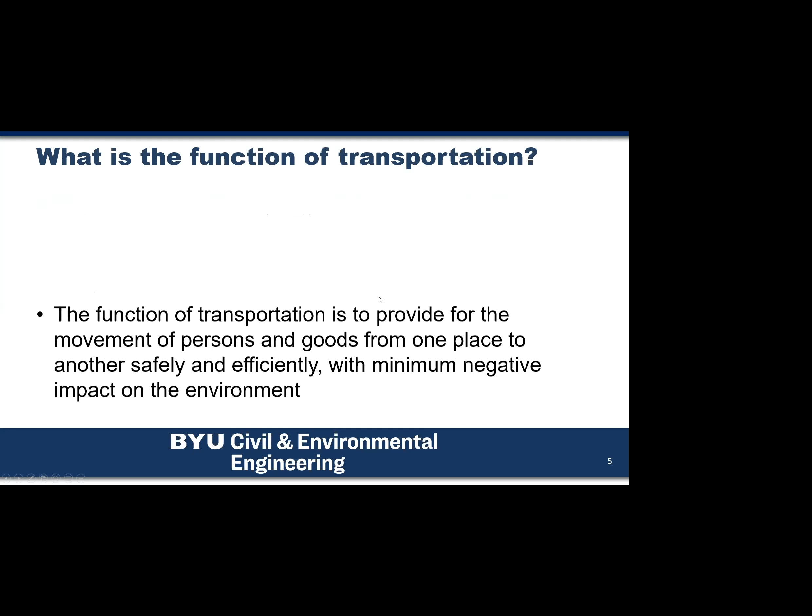So transportation, what's its function? Well, it provides for the movement of persons and goods from one place to another, safely and efficiently, with minimum negative impact on the environment.

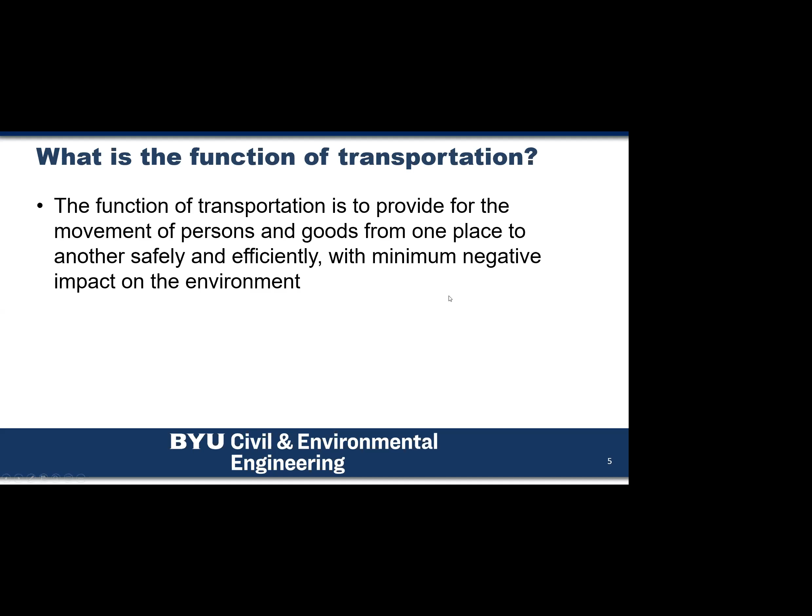That's one of the things we're trying to focus on, is minimum negative impact on the environment, and having an opportunity to provide a sustainable transportation system, so that we can all be a part of that well into the future.

When we think of the longer definition of transportation engineering: applying technology and scientific principles to the planning, functional design, operation, and management of facilities for any mode of transportation. There are a lot of pieces to it—planning, design, operations, and management for all those different modes, whether it's bicycles, auto, or air—so we can provide safe, rapid, comfortable, convenient, economical, and environmentally compatible movement of people and goods.

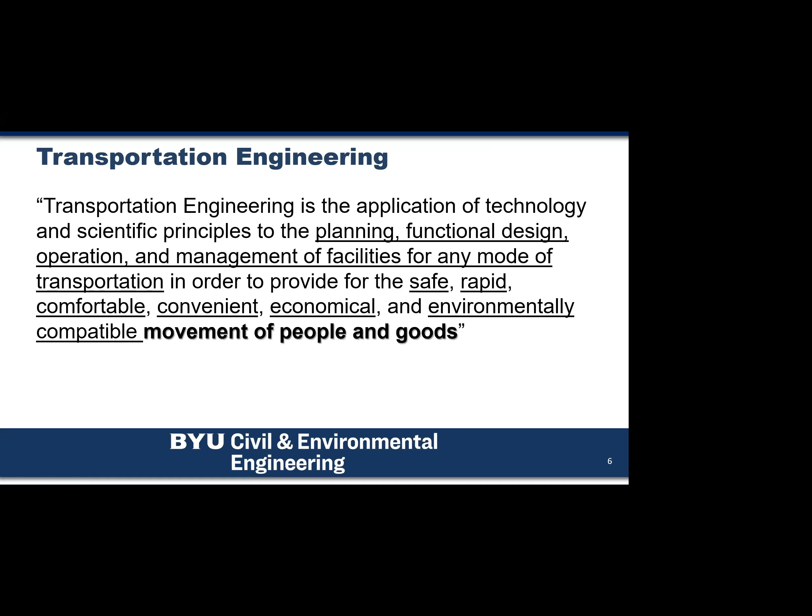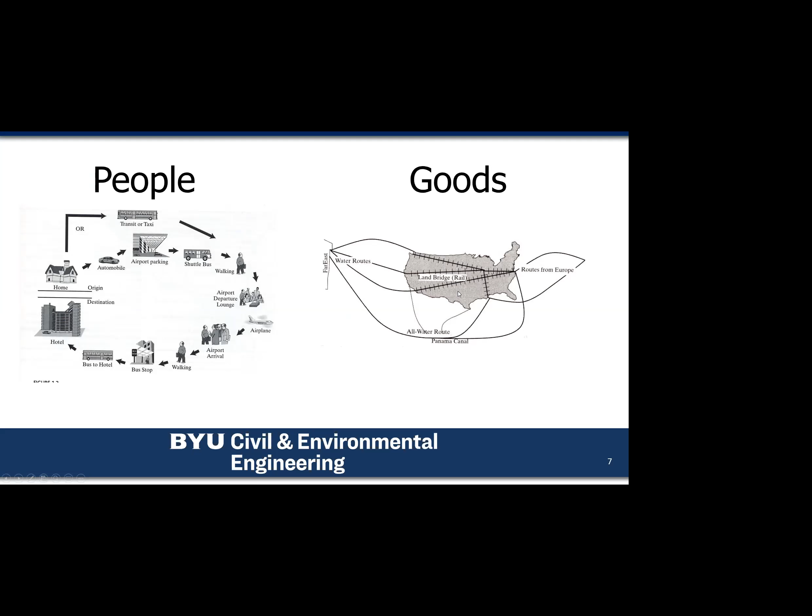Here's a couple of quick examples. You can see moving from your home to an airport, taking an airplane, arriving somewhere at another airport, a bus or rental car—all of these things involved in getting from your point of origin to your point of destination. And if we look at goods, we've got water routes, air routes, rail, auto or trucks—all these different things giving us the goods we use every day. All of that is also a big part of transportation.

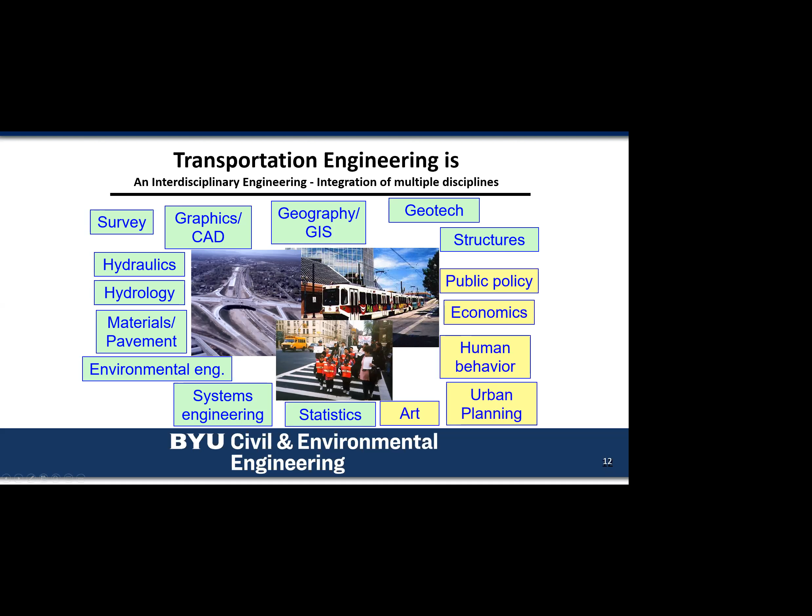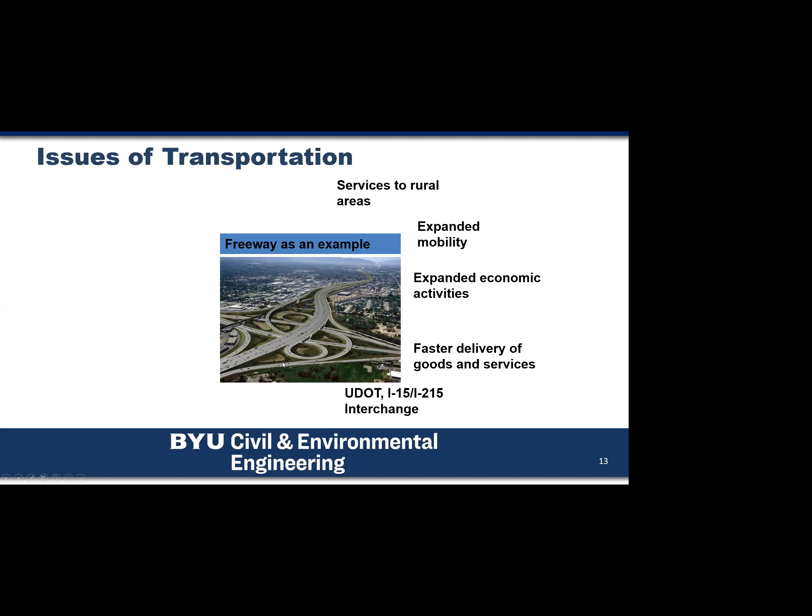And with that, we see some issues and challenges we have to look at. How do we provide service to rural areas, expand mobility, economic activities? We also have environmental challenges: congestion, delay. We've all been caught in congestion at different times, no matter what mode of transportation we're in. We have safety concerns. There's a lot of different things that we need good, strong minds to figure out ways to make better all the time.

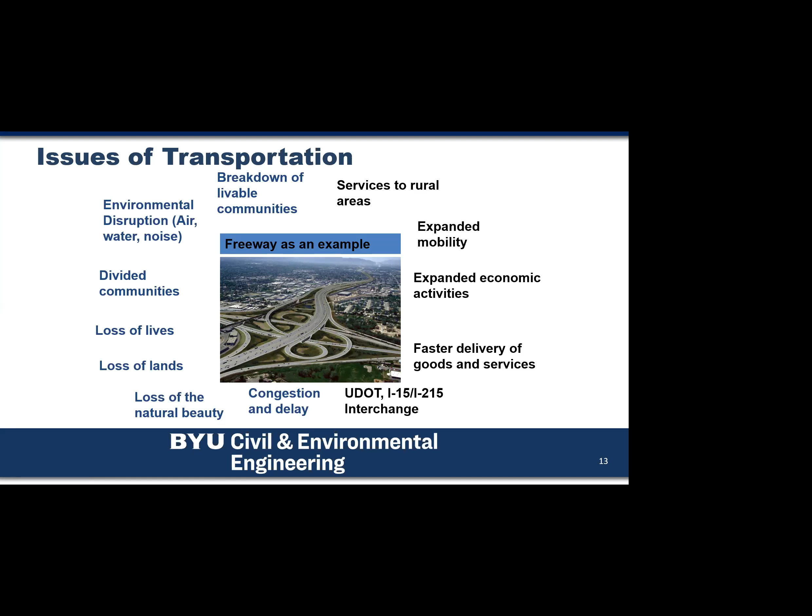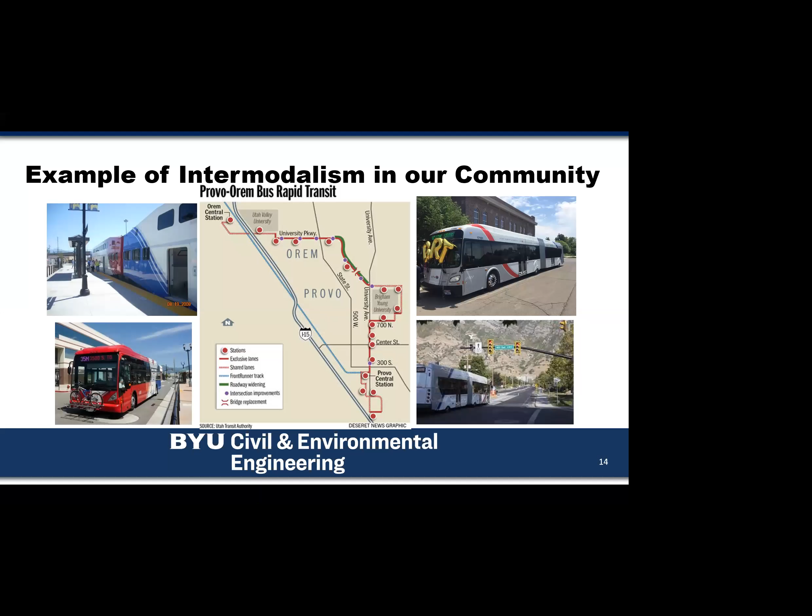We have intermodal transportation systems. So we've got the FrontRunner, the UVX. We've got a lot of different opportunities for us to be part of an intermodal transportation system.

The UVX bus, we're not using it as much now, but the question I have for you: have you ridden on UVX? True or false?

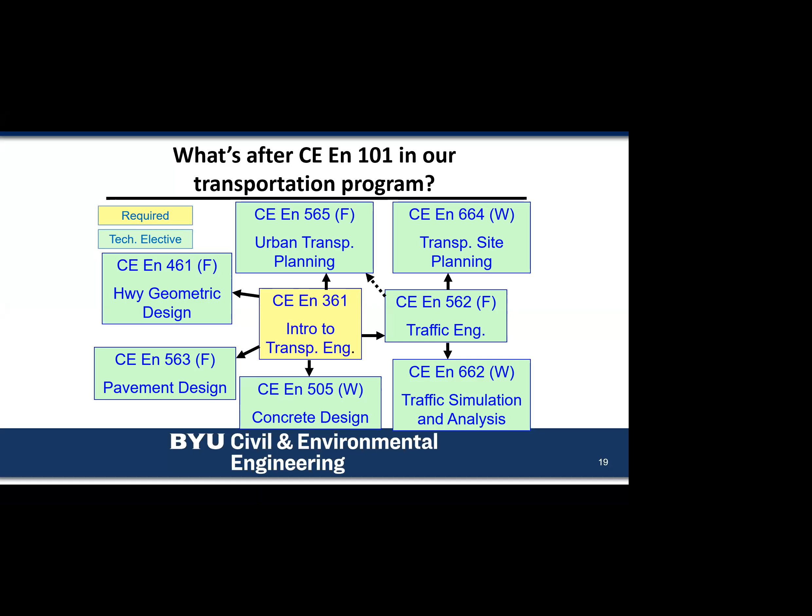So there's a question in the chat: when you say competitive, are you talking about getting a job? Yeah, I mean, that's making you a competitive engineer in terms of getting a job and being able to have the skills that will help you get that job, or maybe that little better job than you might have otherwise gotten.

So we have 3 faculty in transportation in the department. There's myself, and then Dr. McFarlane is our transportation planning engineer. Dr. Guthrie is pavements and materials. And the area I work in specifically is traffic engineering and safety. I've also done a bit in planning over the years and had some experience there as well.

I guess I'll throw this out too, I didn't talk about it in my introduction: I've been here at BYU for 17 years. Prior to this, I was at the Texas A&M Transportation Institute. I got my PhD at Texas A&M University. Before that, I was a consultant in Salt Lake City for several years and in Boise, Idaho. So I spent some time in the consulting world, then went back to school, started into research, and then came to the university here.

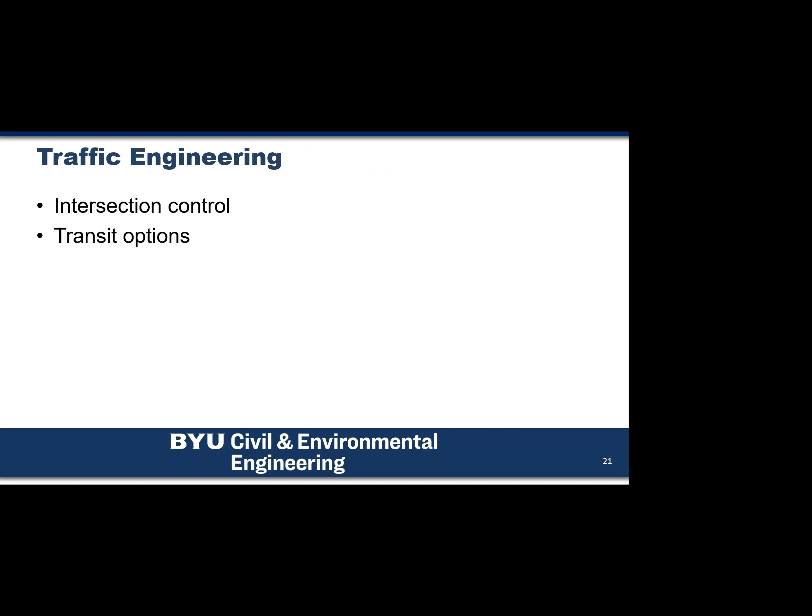So let me just talk a little bit about some of the different aspects of transportation, traffic engineering. I'm going to talk a little bit about intersections and transit, and I'll talk just for a few minutes about planning and pavements as well.

But one of the things that we look at in transportation, and one of the things that's kind of fun about being a transportation engineer, is everybody really is a transportation engineer in their own way. If you have a driver's license, you feel like you are a transportation expert sometimes. So it's kind of fun, we get a lot of opinions that we have to work with and look at different ways to improve transportation engineering.

So this is one of the things that we are always looking at ways to deal with: left turns. If we didn't have to deal with left turns, if everybody would just be like UPS and drive right turns and go in circles, then we would be able to move traffic a lot faster and safer, but people may not get anywhere, at least in the way that they're used to getting. So left turns is something that we're always looking at.

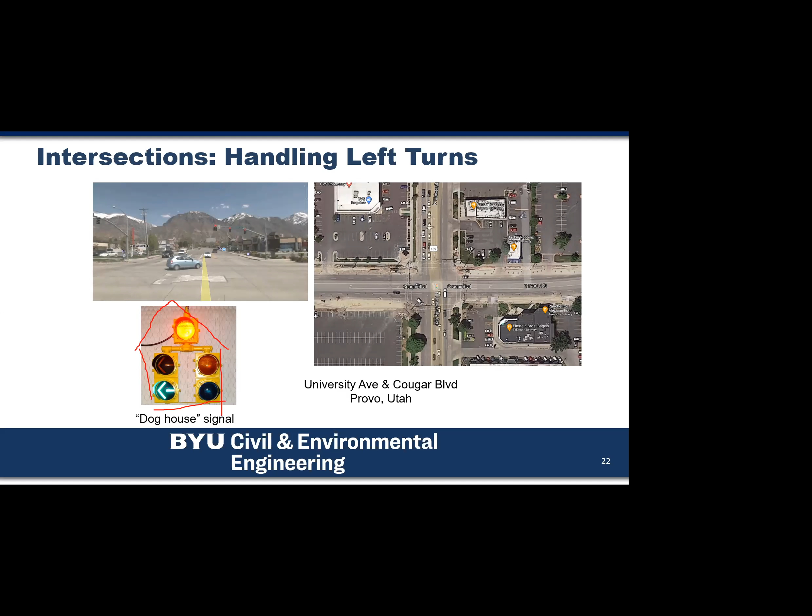Now, that's how we used to do these signals, but we've now changed them to what we call a flashing yellow arrow. Maybe some of you have seen flashing yellow arrows before if you're in Utah. Maybe some of you haven't been to Utah much and have seen these in different places. But this is basically the same thing as this doghouse, but what it does is it provides us opportunities to handle left turns in different ways.

So we can do them as a protected left turn, which is when we have the solid green arrow. We can do them as a permitted left turn, where we have the flashing yellow arrow, and then a solid yellow arrow, of course, red arrow meaning we don't go. But those are some of the things that we do with left turns.

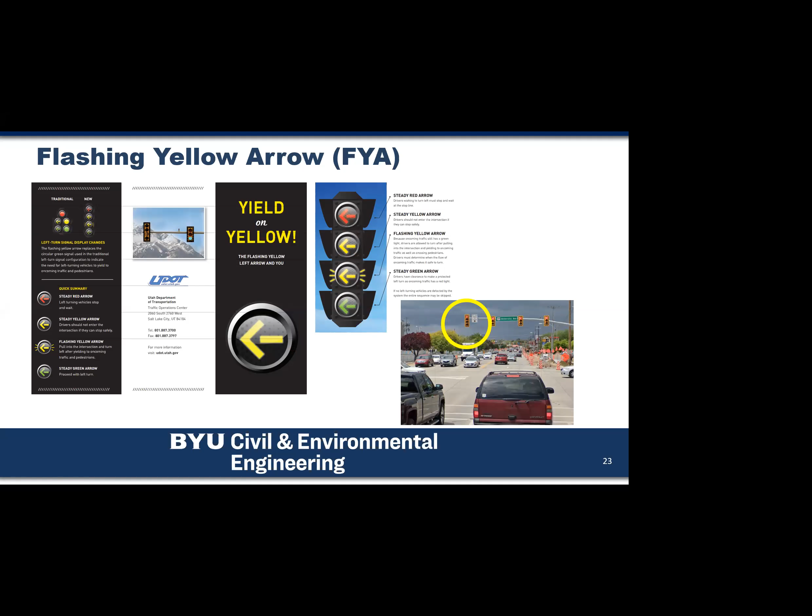In Utah, we like to do some other things with left turns, though. Those get into kind of some interesting intersections and intersection designs. So let's see if we can make this work. This is what we call the continuous flow intersection. I'm sure that you've seen this, and we'll see if my little link is going to work for us.

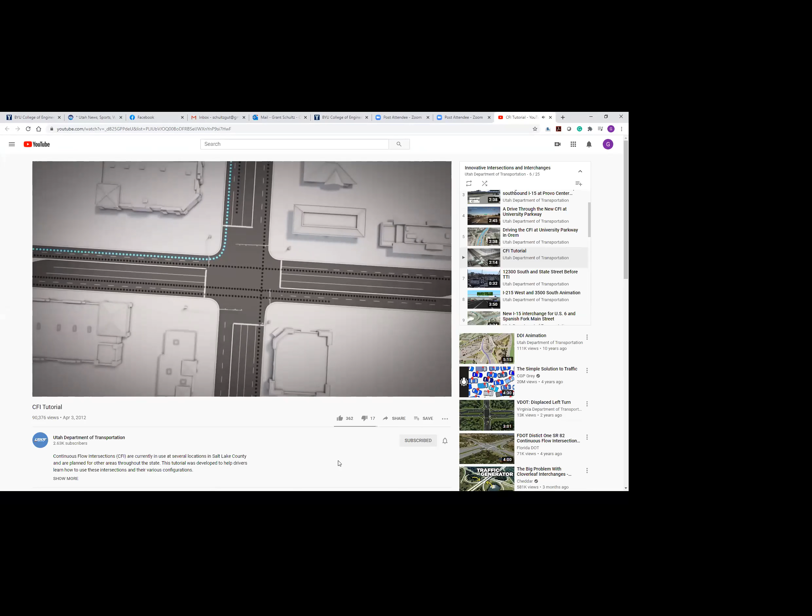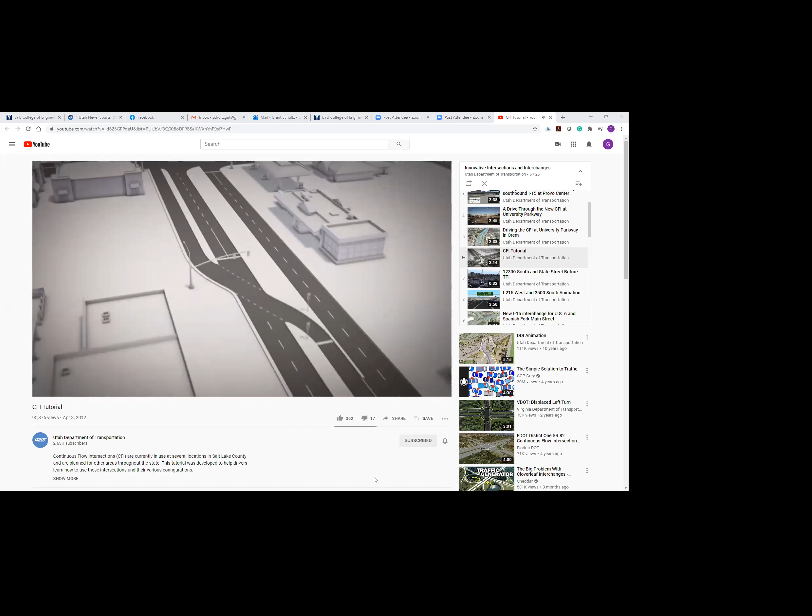At UDOT, a major goal is to optimize mobility. And in Utah, the Continuous Flow Intersection, or CFI, has been used to optimize east-west movement. It all boils down to traffic signals, a crucial safety feature of a busy intersection. Traffic signals help drivers avoid potential conflict points. But a traffic signal also means you can't keep moving. And the more traffic there is, the more complicated the signals. A CFI reduces conflict points, which leads to more green time at the intersection. The most visible feature of a continuous flow intersection is the left turn crossover. This allows drivers to make their left turn before they reach the intersection, reducing conflict points. This feature alone has been proven to increase the number of cars moving through the intersection by up to 70%. But for a CFI to work at its maximum potential, drivers should be aware of all its features.

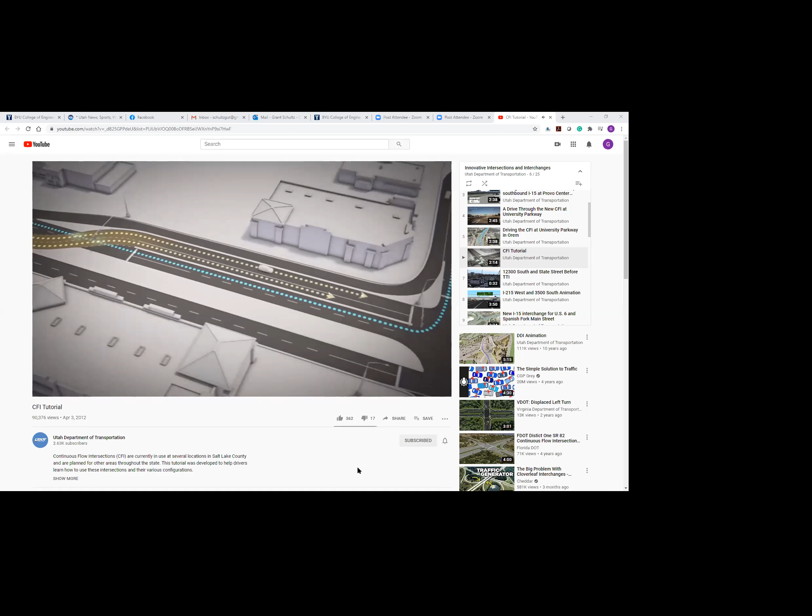In a continuous flow intersection, the fewer crossing lines of traffic, the better. So a CFI can include a bypass right turn, which allows right-turning cars to avoid cross traffic altogether. Sometimes a bypass right is omitted in order to keep local businesses operating. Avoiding business disruptions supports the economy. In such cases, right-turning cars must wait at a special light before proceeding. This light prevents conflicts with the left-turn crossover vehicles.

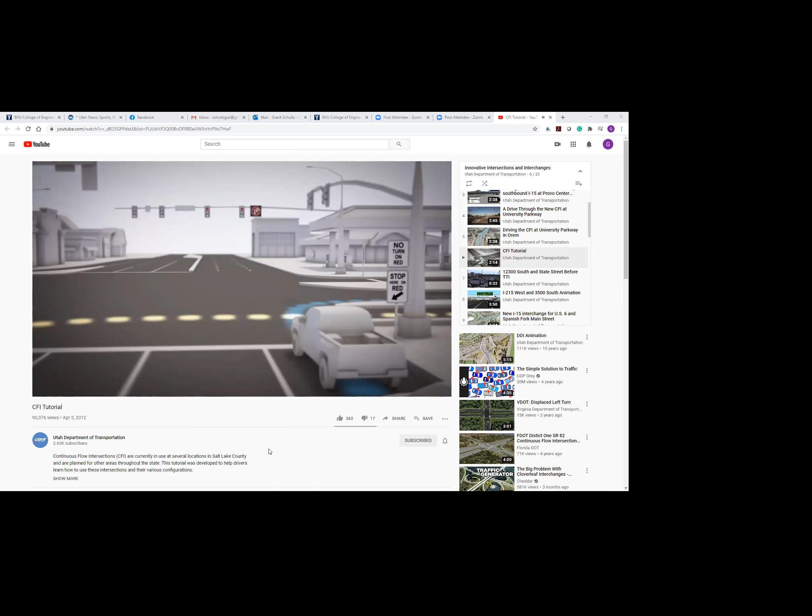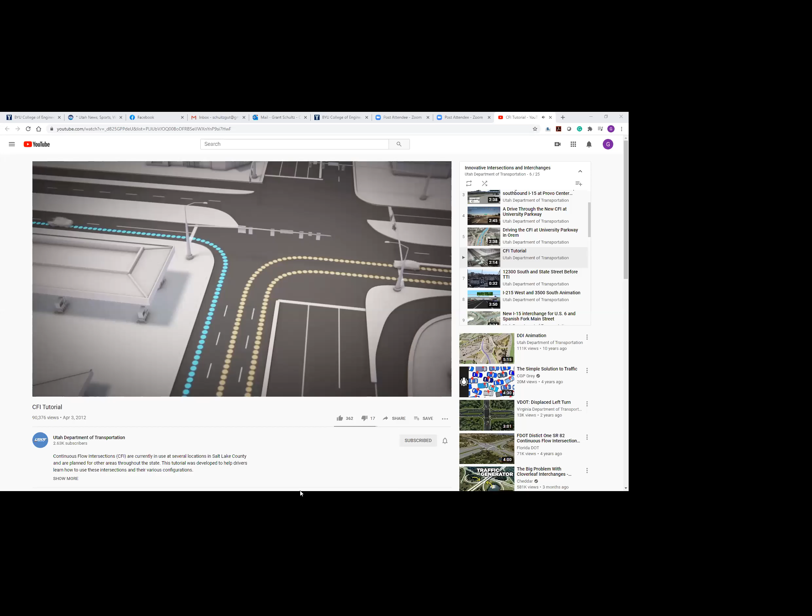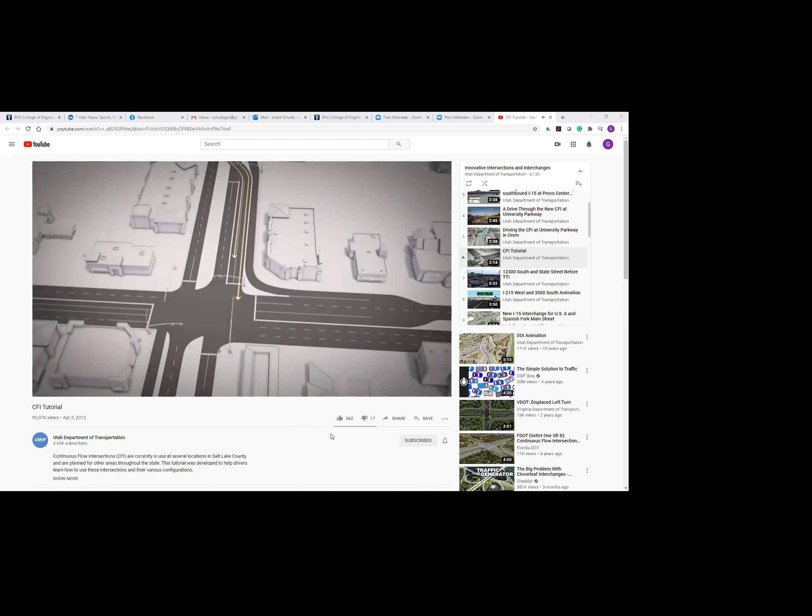Sometimes crossover left and right-turning drivers will converge at the same time. It's important that each car stay in its own lane as these vehicles come together. Sometimes drivers get distracted and drift out of their lane when turning, but this doesn't work in a CFI where each driver needs their own lane to turn safely at the same time. If the road isn't wide enough to receive all incoming traffic, right turns may need to wait for crossover lefts while other drivers continue moving. Once the crossover lefts are finished, right turns are free to keep moving. Continuous flow example of how UDOT keeps you moving.

All right, so there you go. There's one type of intersection. I should have probably had a poll here to see how many of you have seen a CFI. But this just kind of gives you that opportunity.

One of the things, like I talked about, was left turns. Left turns become a real challenge for us in terms of being able to accommodate all the different movements at an intersection. So what this does is brings that left turn movement further back so that these vehicles can turn left at the same time as the through movements. So this is a really good opportunity for us to move those left turns out of that intersection.

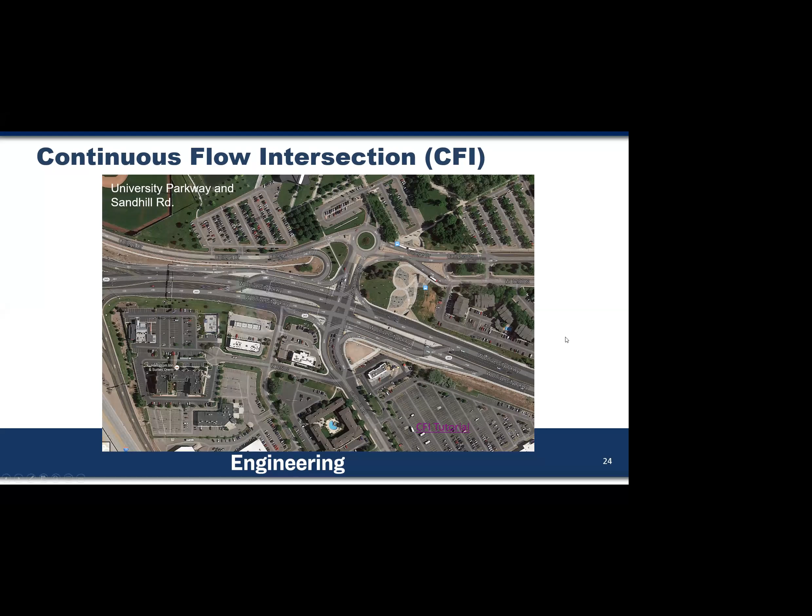One of the other things that we see or that we look at is what we call a diverging diamond interchange.

This is another opportunity for us to take the left turns out. So in this one, we come off the freeway, and if we're going to turn right, we come up this ramp here and go on our right turn just like we normally would. Or we can come up here, and in a normal intersection we would come off of here and have a signal right here and have to wait to cross over to our intersection. But here we actually turn left and go the wrong way.

Now, some people get a little concerned about this. They don't like to go the wrong way, but it's the right way in some countries. And then we get to this point where we have an intersection. So at this intersection, we now have the opportunity to cross back over and continue on our way. But by bringing the driver to the left side of the roadway, we're able to avoid conflicts with these left turns, and all we have are these two-phase signals at each side of the intersection. Fewer conflicts means a safer environment, and allows us the opportunity to provide a safe transportation system. These vehicles come off here and go onto the freeway this way, and we have the same thing coming off all of the other directions.

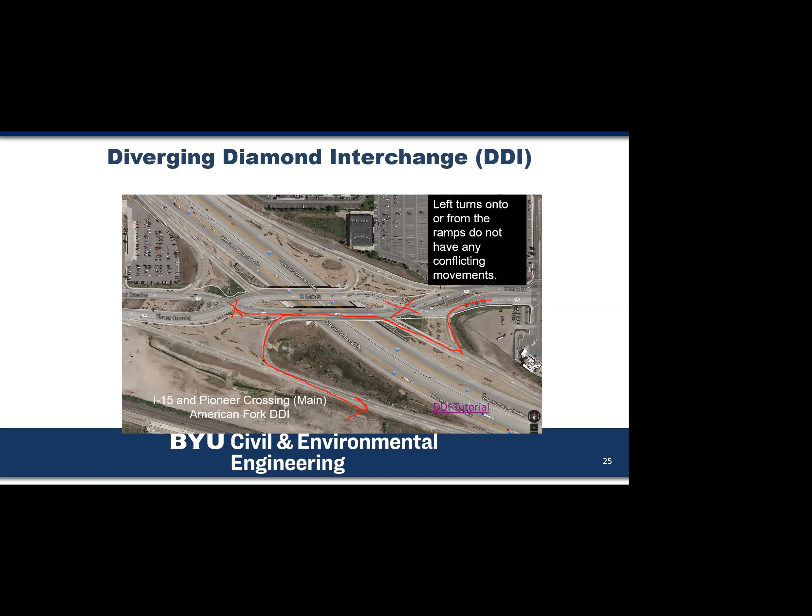Let's see, Provo Center Street—yeah, we won't talk about that one. That one does not do much for left turns and does some interesting things. Yes, where I drew the X's, there are traffic lights.

All right, anybody have any other questions about those two, CFI, DDI?

How common is it to remodel older designed overpasses and intersections into these newer ones? That's a good question. There's definitely a cost involved, so usually there has to be a need, and that need is usually a safety concern or an operational concern. We do see that happen. Bangerter Highway in Salt Lake City is one area where we went from regular intersections to CFIs. Now we've also done just a standard diamond interchange, a tight urban diamond, because there's not a lot of room there since it's all built out, so they utilized the space they have and did a diamond interchange.

Let's see, video on DDI decreasing the chance of an accident by 50%—yeah, because we've taken out those conflict points. I don't have anything in this presentation about conflict points, but that's a critical piece of it. And like I said, we won't talk about Center Street. You'll have to take 361 from me and we'll talk about it there maybe.

Why is I-15 always under construction? We'll end with that question and move on. Because we're engineers, we love transportation, we love construction. So I always tell my students that the orange barrel is your job security.

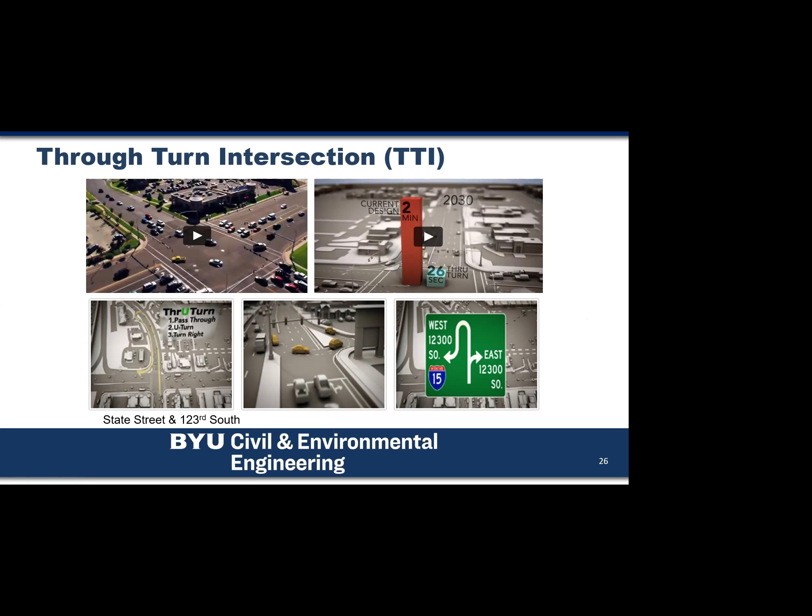So there's one other way we look at left turns in this presentation, and that's through what we call a through-turn intersection. This one is a little different again.

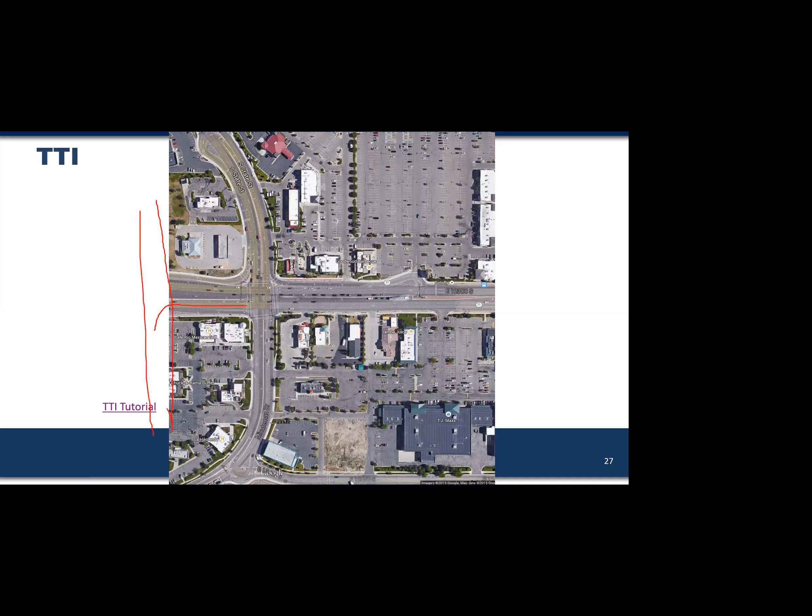Here's what we had: this is right off I-15. We come off the freeway and come to an intersection, and suddenly you've got a really heavy volume intersection. If we get a lot of left turns at this intersection, whenever those left turns are moving, it stops our through movement—we can't move any through traffic. So we have to look at other alternatives.

One alternative is to get rid of all the left turns here and run vehicles up further, where they do what we call a through turn—they come around and then turn right. Again, we're taking left turns out of the intersection while still maintaining through movement. You can see there's a through turn over here, one up here, and one back here.

So this takes those left turns out of the intersection and allows us a different alternative. This kind of came about from jug handles, Michigan left turns—there are a lot of different names for how this got started. They were generally in rural areas in the past, and UDOT decided to try one in an urban area, and it cleared up traffic concerns and allowed movement to flow more smoothly.

This one is in Draper, at 12300 South and State Street, right off I-15, and there's a lot of opportunity there. These came about more in the east, and we've kind of moved them this direction. So those are just some examples.

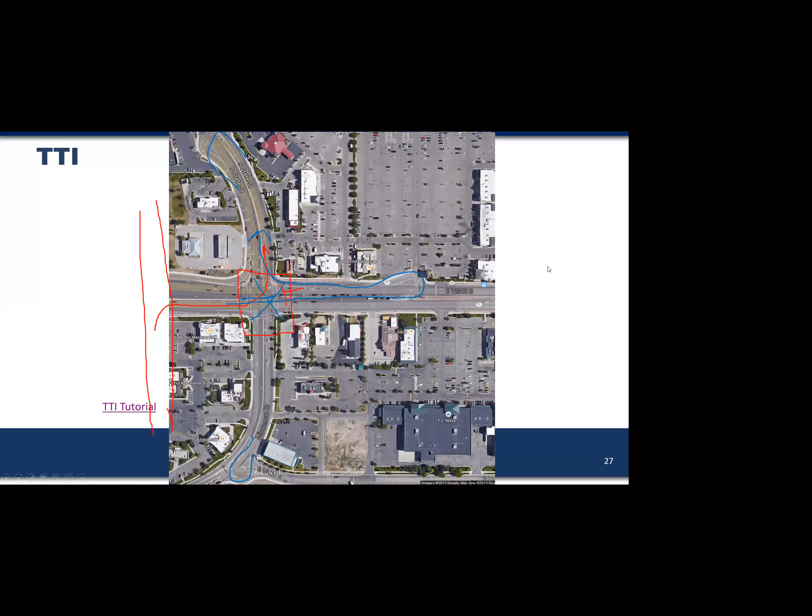We've done different projects related to safety, which I'll talk a bit more about in the few minutes I have remaining. We're doing some work right now on connected vehicles, looking at what's called dedicated short-range communication—we've done it between transit buses and signals, and now we're doing it between snow plows and signals, so we can look at transit signal priority or signal preemption for snow plows to keep them moving down the corridor.

We're doing some work on automated traffic signal performance measures. We're working on traffic incident management with the different incident management teams out there that help clear up crashes after they occur on the freeway. So a lot of different projects, a lot of different things going on here at BYU.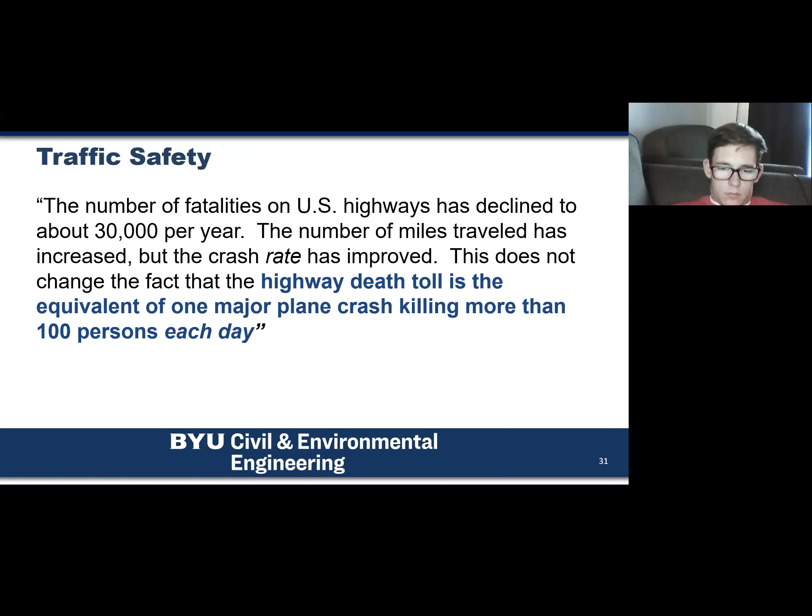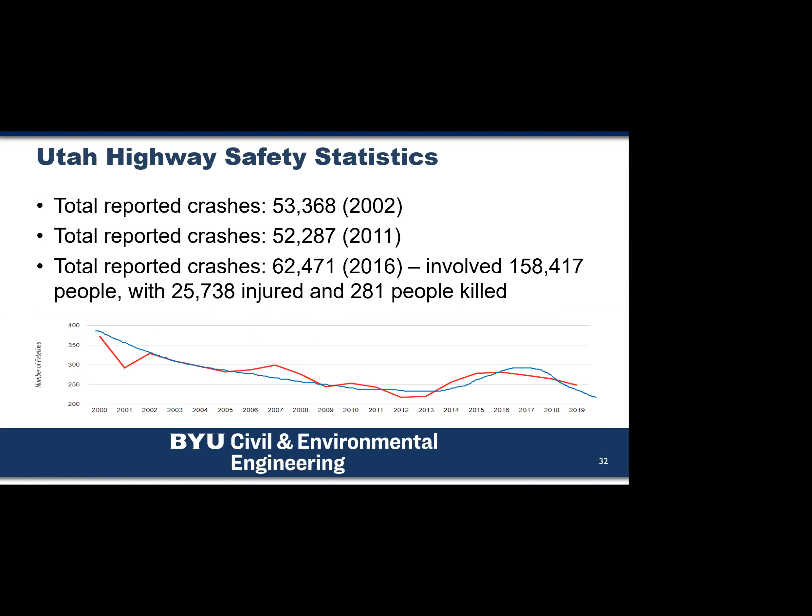Safety, we have a lot of fatalities that occur. Our highway death toll is the equivalent of one major plane crash killing more than 100 people every day. So I spend a lot of time working on safety, trying to identify ways to make our roadways safer. And you can see we've made improvements over time. Everything was coming down nice, and then we had a little blip, and now we're coming back down again.

If we look at this one for a minute, we can see fatality rates. Our fatality rates have dropped over the years, but our numbers of fatalities are still pretty high, 35,000 a year. So that's one of the things I work on.

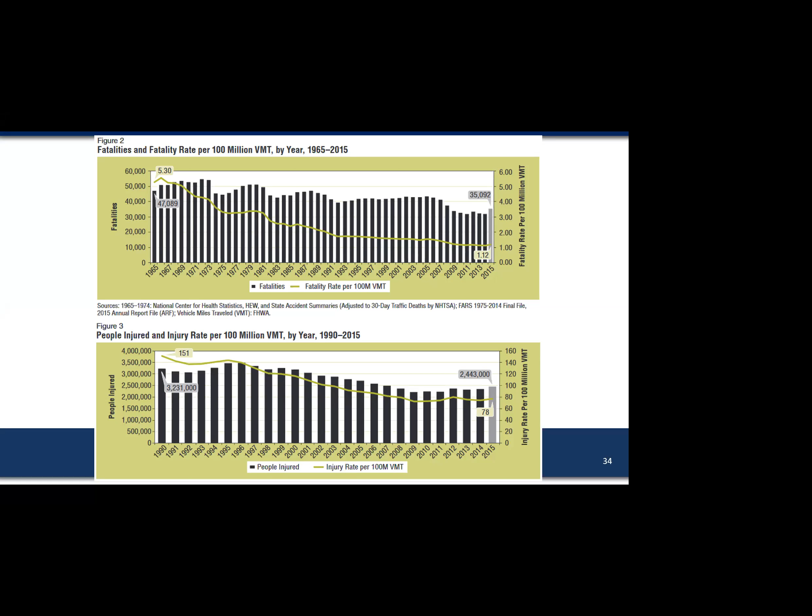Planning, Dr. Macfarlane does a lot of work in planning. Basically what planning is trying to do is make decisions of how big do we make the roads, what are our needs going to be 20, 30 years in the future. We see all those construction barrels out there in projects, but those projects have been in the planning stage usually for 15 to 20 years. It takes that long to get through the process of planning and environmental clearances, actually designing the project, getting the funding that we need, and then being able to get in and build that project. So we're always looking to the future, 20 to 30 years ahead, to decide what we're going to need.

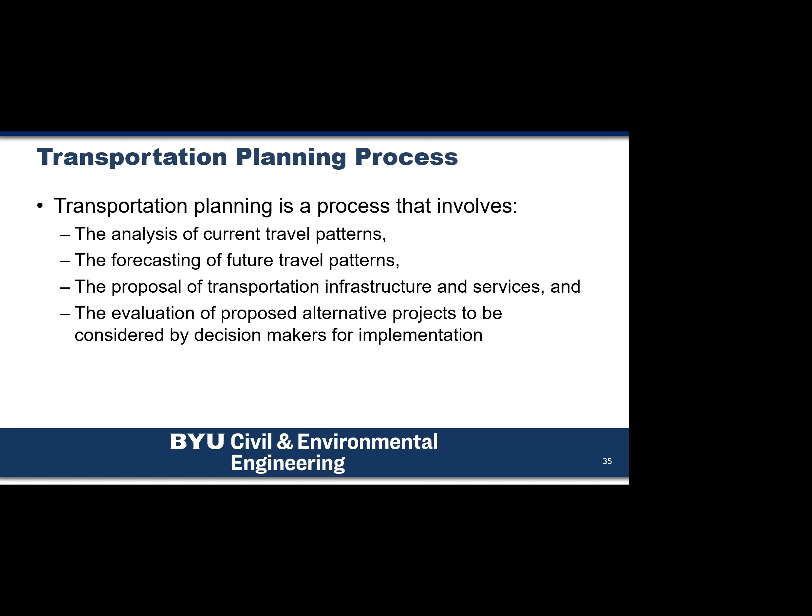Just kind of thinking about that, let me jump into here. All of that ties into what's called a 4-step planning model, where we make decisions every day. We try to decide what kind of trip we're going to make, where we're going to go, what mode of transportation we're going to use, and what route we're going to take. All of those things are really helping us to make decisions on what's going to happen in the future.

A question came up: if it takes that long, won't the plans be outdated? Well, that's the thing, we're making projections to the future. Yes, we're always adjusting those projections, but they're pretty close in terms of what we're trying to plan and accommodate.

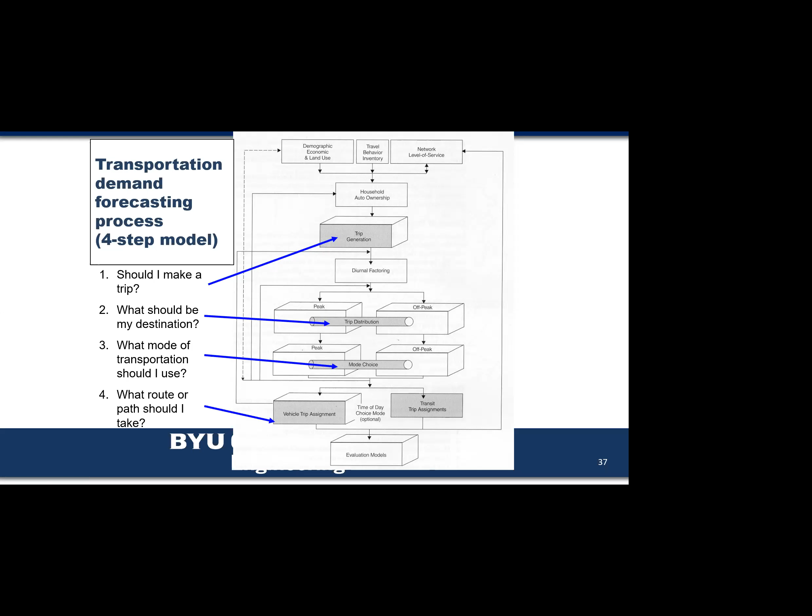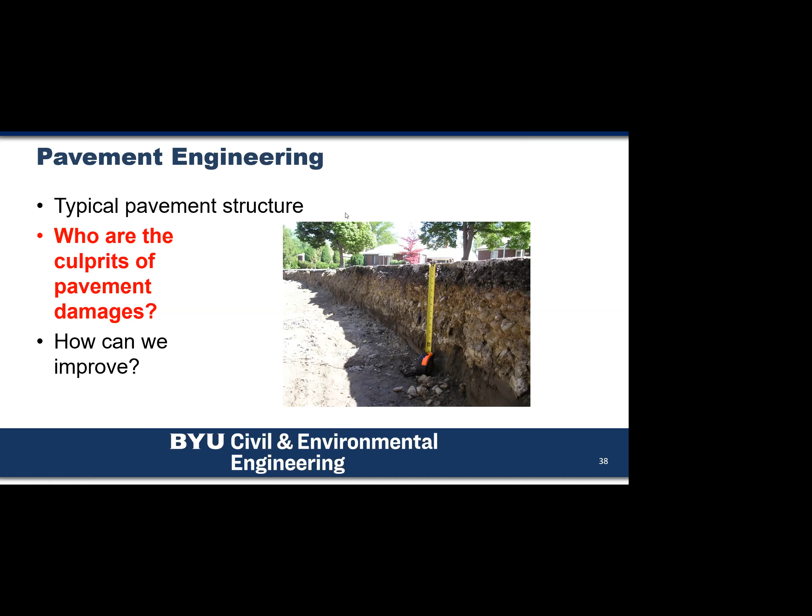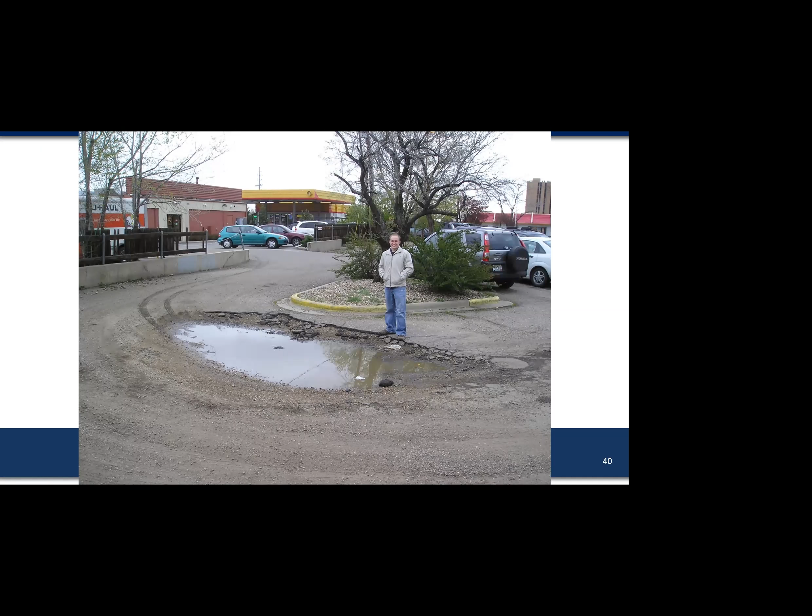And then the other piece of all this, of course, is as we get our transportation system built, we start to see it fall apart a little bit. So we've got to make sure we're designing it appropriately and avoiding things like this. We've all seen this, and none of us like it. This is what Dr. Guthrie spends a lot of time working on, how we can improve our pavements, create a better base and sub-base so that our pavements last longer, because we really do want to avoid things like this, and we don't want to have sinkholes that eat up trucks.

A lot of that impact comes from different types of vehicles, right? We've got small vehicles, animals on the road, large trucks. Those large trucks really cause a big portion of the damage, but they're so critical for our economy, so we've got to make sure we can accommodate them. About 3,000 SUVs or 4,000 autos is the equivalent of one truck on the roadway in terms of impact. So we want to look at how that works.

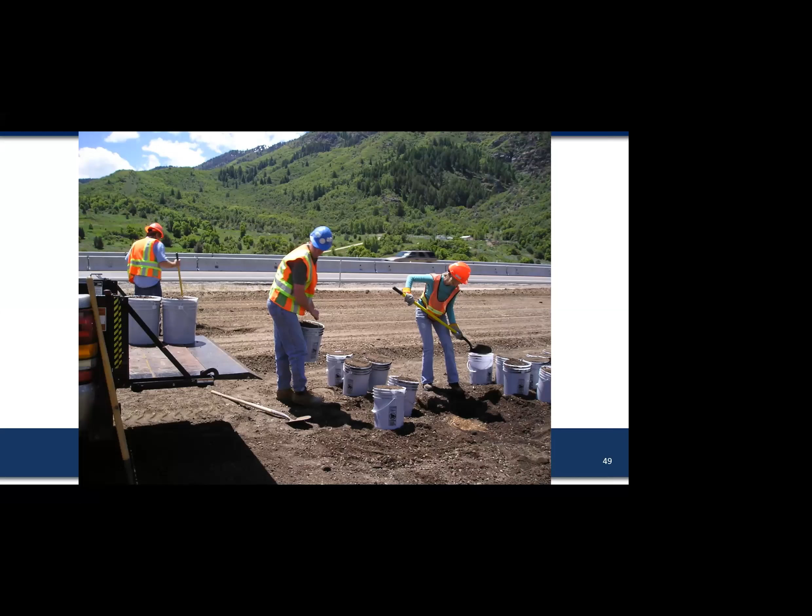And then we get into just a lot of different types of pavement damage. Just a few pictures here, but Dr. Guthrie does a lot of research looking at ways that we can improve pavements, have a system that lasts longer, and be able to have a successful transportation system. There's a lot of cool things going on in that as well.

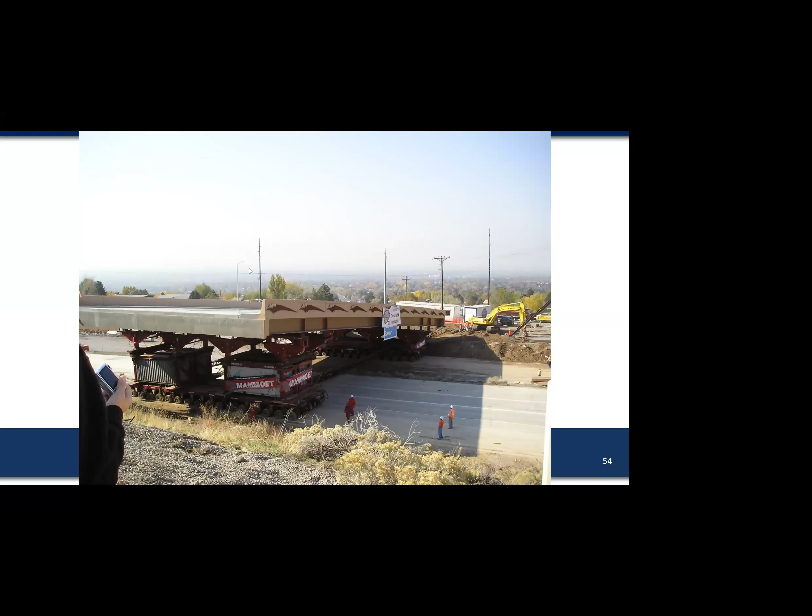Bridges, you talked about structures and bridges. We've come in with some new ideas and ways to build structures as well. We actually build them on the side of the road and then move them into place. With an automated bridge system, we lift the bridge up and put it in place. That's where we make sure, or hope, that we did a good job in our design so that it actually fits when we put it into place.

So that's kind of a lot of it, just gives you a real brief overview of what transportation is. There's a couple of other comments here in the chat. Why do the plans take so long? Well, we have to be planning and looking for the future. It doesn't necessarily take 25 to 30 years to plan and design that entire project, but we're always looking to the future, and then we work in increments. We've got the long range plan, which is 20 to 30 years out, and then we have a 5-year plan where we're actually doing design, getting the funding that we need to make the projects happen and keep them in place.

So these projects being built now, at one time they were in the 30-year horizon, now they're in that 5-year plan, and we're actually building them. There's a lot of things we have to look at there, like Dr. Frankie said, and it looks like a lot of other things too. Any other questions? We just have a couple minutes left, but any other thoughts or questions?

Let me finish off with this last poll. After today's discussion—oh, whoops, somehow I didn't change the question there. But the question is really, after today's discussion, how many of you want to be a transportation engineer? Sorry, just disregard that other question. I pulled it out of my other polls from my other class, and I must have forgotten to change that one. So after today's discussion, how many of you really want to be a transportation engineer?